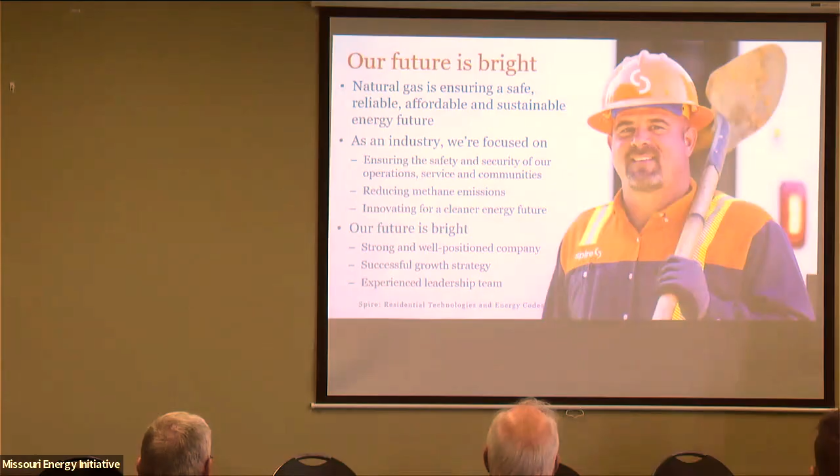I think we heard throughout this conference, and just in general, that natural gas is going to play a part in the energy needs of this country, the Midwest, and Missouri for quite a while. So we do think the future is bright for our industry. Now the question is how do we play into that world? What do we do? What can we do to help out? I'm going to talk a little bit about that as we go on.

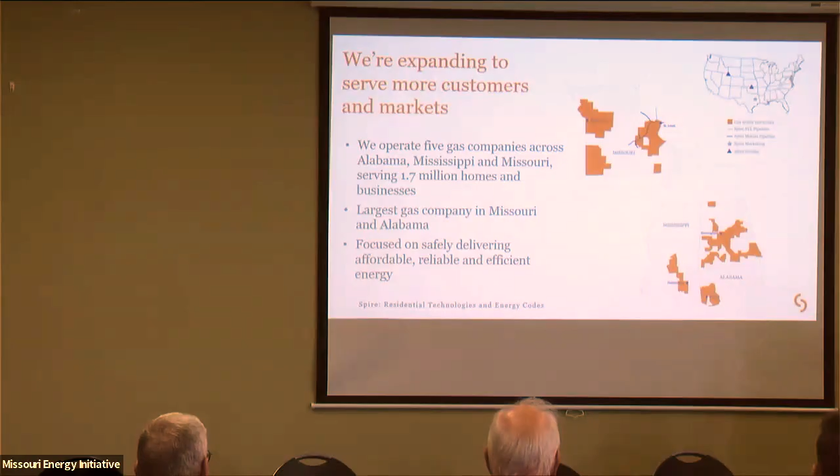Just as a footprint of where we're at, we're the biggest gas utility in Missouri and in Alabama. We serve about 1.7 million residential and commercial customers throughout those areas, and got a little bit in Mississippi as well. On the unregulated side, we have a marketing group out of Texas who handles procurement for some of the larger customers in this area and around the country. And in recent years, we've gotten a gas storage in Wyoming that we basically started the last couple of years. So that's kind of who Spire is and where we're at.

Just a little bit of natural gas at a glance. We've heard these words throughout the conference so far, but to put some numbers to it, we focus on some of the benefits we feel we bring to the table. I'm not going to go through all of these, I know it's a bit of an eye chart, but reliability—because of some of the technologies over the last decade, it's created a lot of supply. We have 100 plus years of supply, and the great part is it's domestic. There's very seldom outages, so that's a component we use, and some things coming up will show why people use us in that fashion to make sure we're there.

Affordability—we've heard that several times too. We pride ourselves on being an energy that's affordable to homes and businesses compared to other energies, and it's brought savings to those. We want to continue that, and we feel that's going to be out there for a long time—long-term affordability, especially with the supply and reliability we have.

And efficient. There's not many fuel sources where it's at the home at 92% efficiency. So there's not a lot of losses along the way. We don't have to generate it to get there. So at your home or business, you're at 92% efficiency for that energy—there's not much loss.

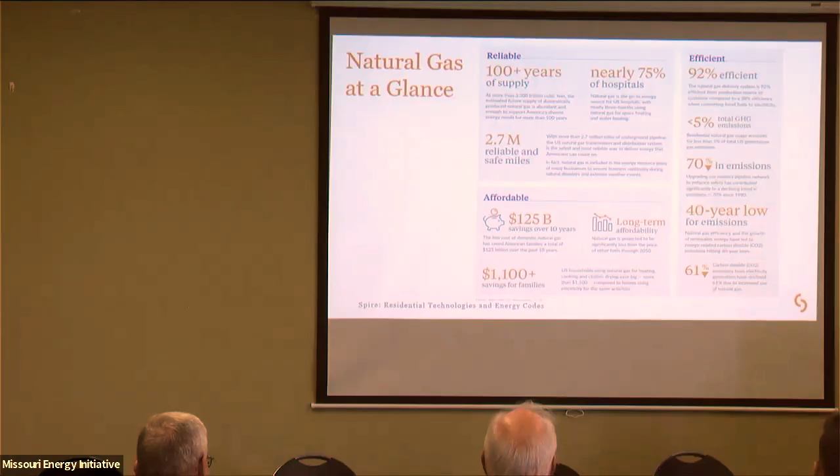And then emissions. A lot of this has to do with energy efficiency and the way homes and businesses are built now, which has reduced emissions. But most of this comes from electric generation switching over from coal to natural gas—a big reduction in emissions over the last several years because of natural gas.

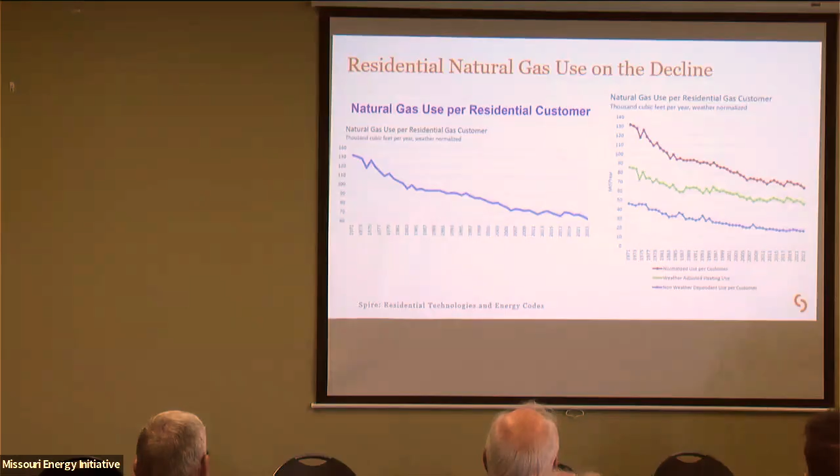I probably should have had this in a different part of the slide deck, because I'm going to refer to it again. This is kind of a good sign for what we're trying to do and what our customer needs are. Natural gas use on the residential side has gone down considerably on a per-home basis over the last several years. This chart goes from the 70s all the way up to 2023, and you can see the reduction in the amount of energy a home uses over the years. The one thing to notice, though, is it's kind of flattening out. So what do we do next? How do we work towards that next incremental bump?

The second part of it is broken down not just overall, but into heating and non-heating use. The red line is the overall. The green line shows the heating use over the years, weather normalized, of course. And the blue line shows the non-heating components and how that use has declined over the years.

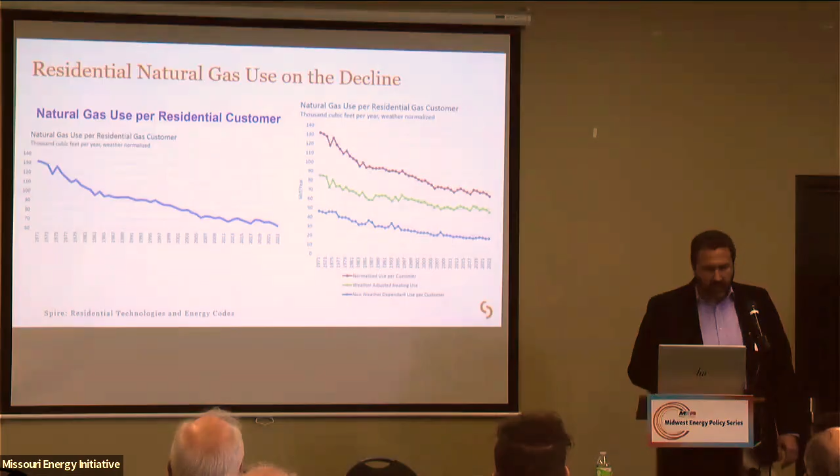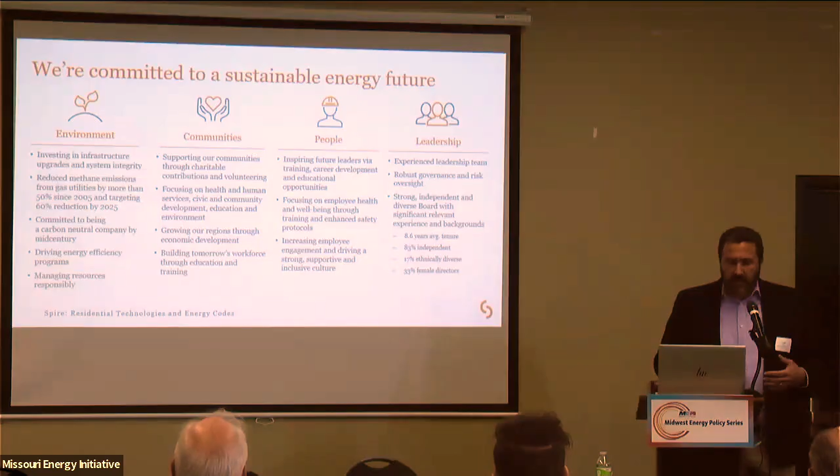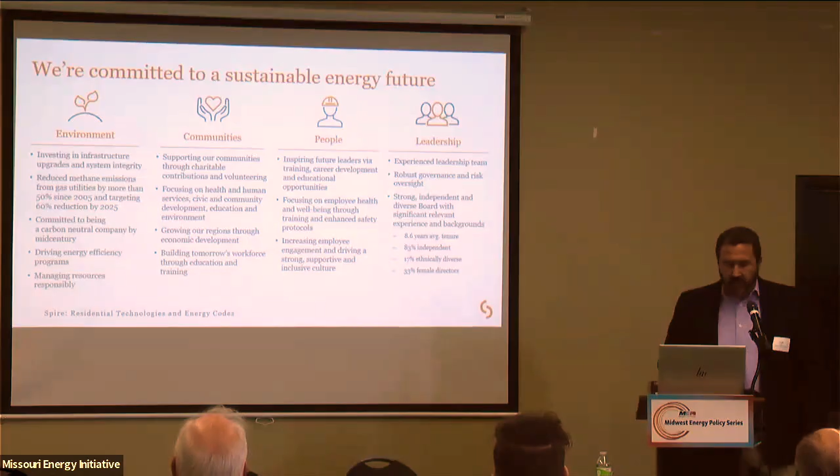I'll talk a little bit about next slide, but one thing we're starting to do more is creating a sustainability plan and report, and you can go to our website and get more details. I think the 2023 one is there, and the 2024 is about ready to come out. But what are some of our commitments and what are some of the things we're doing, not only environmental, but community, people, and leadership, to create a better sustainable future for ourselves and for our energy. Just a couple details of it, kind of things that may be more relevant.

Some of the things here lately that we're starting to do that will play a big part, and this will come out in the 2024 sustainability report, is advanced leak detection. It's something we've piloted and now we're starting to implement. We always do some version of leak detection, but this is a more sophisticated way where we're contracting people out to survey over the next couple of years, 3,000 miles, to try to find out where more of those leaks are at. Kind of map those out a little better, and what that can lead to is more places to fix those leaks, reduce emissions, reduce methane leaks, and create a safety aspect to it as well.

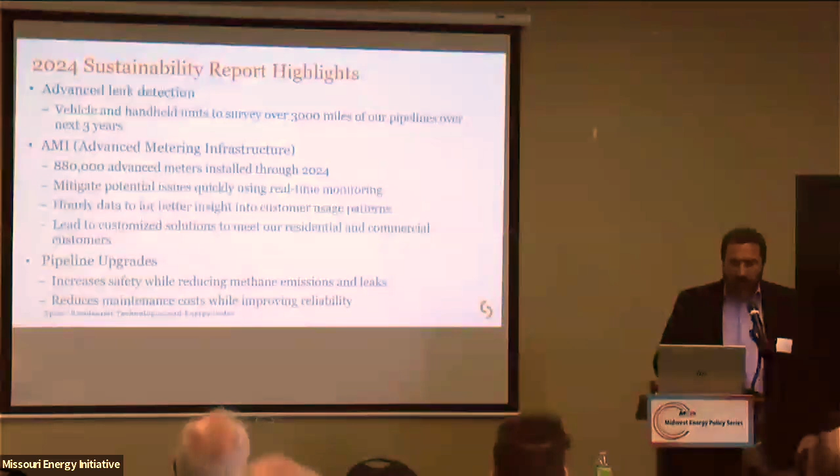A big thing we've been working on over the last couple of years, and we continue to work on, and this is something we're probably leading most gas companies across the country on, is we've replaced about 880,000 meters through 2024 for new smart advanced meter systems. So we're putting in, starting with the smaller meters, residential, small commercial, ultrasonic meters.

I heard a lot the other day and yesterday and throughout this about demand response and behaviors and how we change things. What this is going to help us do is two things. One is a safety aspect, right? With this technology, we're able to either automatically shut off the meter in a safety situation, or we can do it remote. So there's a safety aspect that'll help us out.

But the part that's really going to help us is as far as knowing what our customers are doing. We're going into houses less and less. Over the years we do a lot of soft turn on and turn off, so we don't necessarily go out, we just take a read. So we don't go into homes as much as what we used to, and we have less information about what's in that home. What are people putting in? What does their energy use look like? The advanced metering system is going to help us get a better understanding of what our customers are doing. We're not only going to get daily reads, but hourly, and maybe even further down into that, and use that for a couple things. One is to help us better understand what our customers' energy use is, how they're using it, but also provide that to them so that business or that home can start to make better energy decisions.

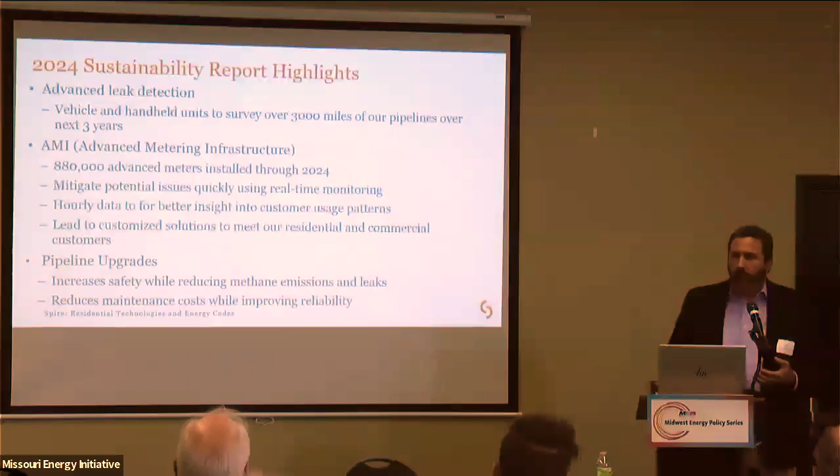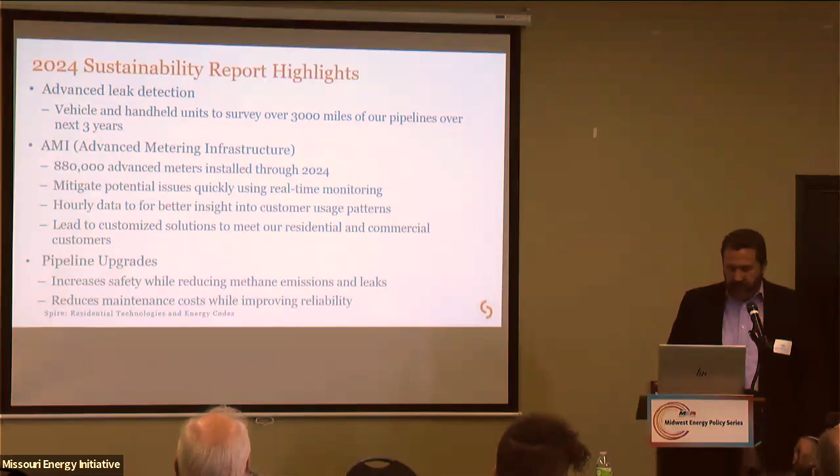And pipeline upgrade. So we're continuing to upgrade older sections of our pipe that typically are more prone to more work, more leaks and things like that, and we continue to do that. That's a safety aspect, but also reducing methane emissions, leaks, and lowering O&M. So those are just some of the highlights from our sustainability report.

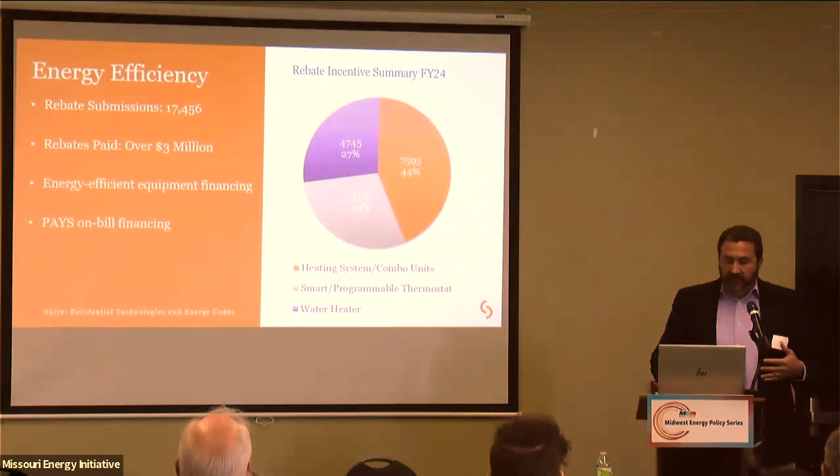So energy efficiency, this is just kind of a summary over the last year, the metrics we have for residential energy efficiency. About 17,000 rebate submissions across Missouri, about 3 million dollars in rebates paid over that time period. On top of it, I don't have the numbers, but we also have energy efficiency equipment financing, and also a PAYS on-bill financing program. How those break down, most of it's the heating, so roughly 45% is on the heating side of things, and the other portion is split between water heating and thermostats. But that's kind of a look into our programs that we have here in Missouri.

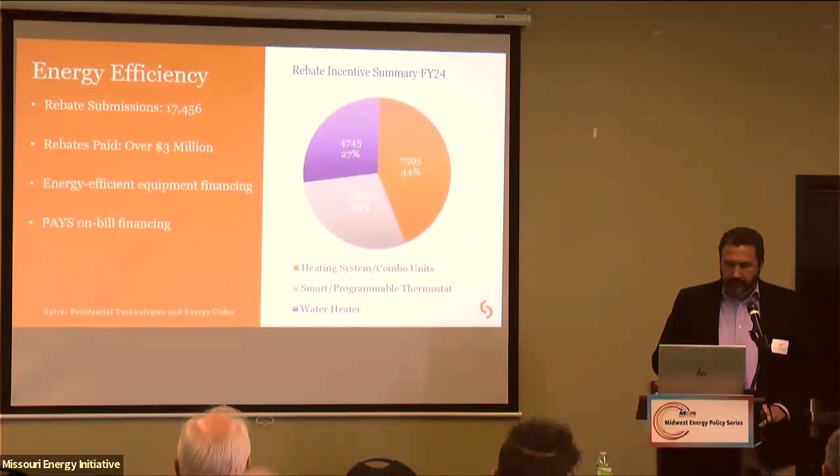From the residential side of things, what are we seeing over the last several years? Just to give a state of the union on what we're experiencing from the residential gas side of things. The pandemic changed a lot of things. I'm still working from home 2 or 3 days a week; I never used to do that, and a lot of people are. What we've been experiencing really since then is that most of these homes, both new and existing, we've seen an uptick in gas appliances overall.

The person's home became something different than what it was before. People are there now. They're cooking there more, entertaining there, working there. And that kind of changed the dynamics. I'll talk a bit about some of the individual appliances we're seeing more market share of.

We are seeing a considerable amount of homes, especially new homes, putting in condensing and high efficiency furnaces, taking advantage of those rebates. High efficiency furnaces are definitely the majority versus non-condensing furnaces. So that's a positive aspect.

But some appliances we're definitely seeing an uptick in, especially in new and existing homes, is gas cooking. Apparently a lot of people are watching the Food Channel and want to be a chef, and everybody's looking at a gas cooktop. So we've definitely seen an uptick in that.

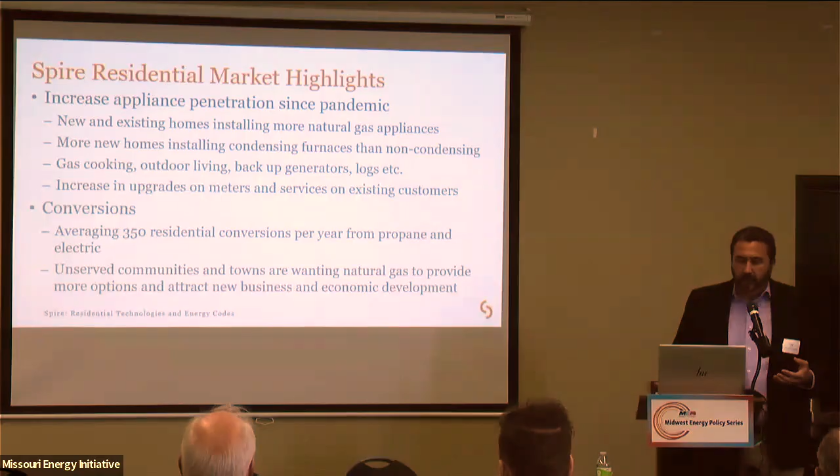We also have - I just had an email yesterday - a lot of unserved communities and towns across the state near our infrastructure wanting natural gas to have more options for their business and better economic development. A pretty sizable town just yesterday contacted us to see what it would take to get gas to their market. So those are some of the highlights of what we're experiencing.

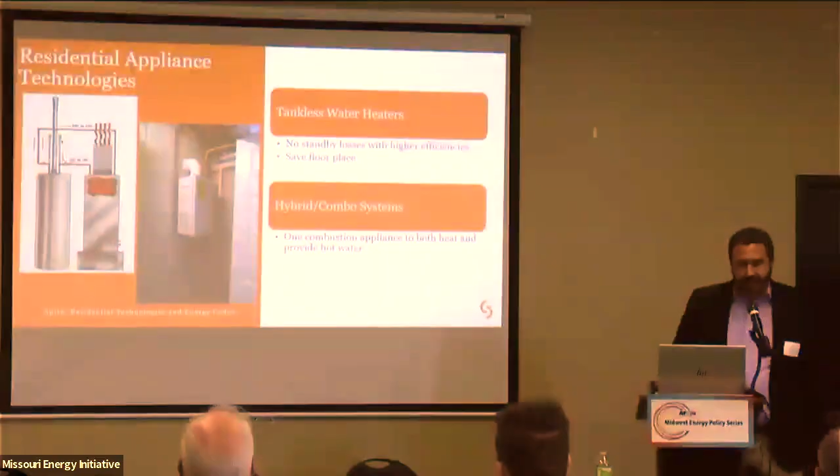A little bit about technology now. I'm going to focus on the technologies that are less prevalent in our area currently, but which I think could have more potential going forward.

Most of these are going to be more energy efficient and can help save on some residential usage. Tankless water heaters have been out there forever. The Midwest and Missouri doesn't see a lot of these. Our counterpart down in Alabama, it's probably a majority of their homes that put in tankless water heaters.

Really, I think what it comes down to is space. Down in Alabama, and actually parts of our territories in the Southwest, Joplin and Springfield, a lot of those areas don't put basements in. So they have space constraints, and those dollars matter. It's the same way down in Alabama. A lot of their HVAC and water heaters are either in closets in the garage, closets in the house, or in some cases attics, and even they're putting tankless water heaters on the outside in warmer climates. But when you do that, they have those space constraints.

Those dollars of spending a little bit more on a tankless water heater is beneficial to them. Whereas most of our areas in St. Louis and Kansas City have basements, so they don't really have a space problem. So we're not really seeing it as much, but I can definitely see something that will increase over time. And they are definitely higher efficiency just because they don't have the standby losses.

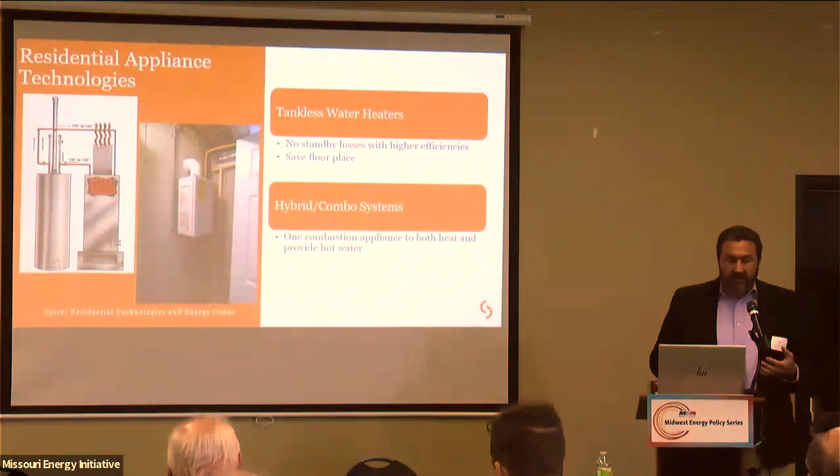It definitely is good heat, and the reason why some go to it, especially in multifamily, is you got one vent, right? One vented appliance, one combustion appliance, and it serves for both heating and water heating. And you can do that with a tank or a tankless. It's prevalent a lot in other parts of the country and in Canada, but we don't see it a lot here in the Midwest. But it definitely has its place.

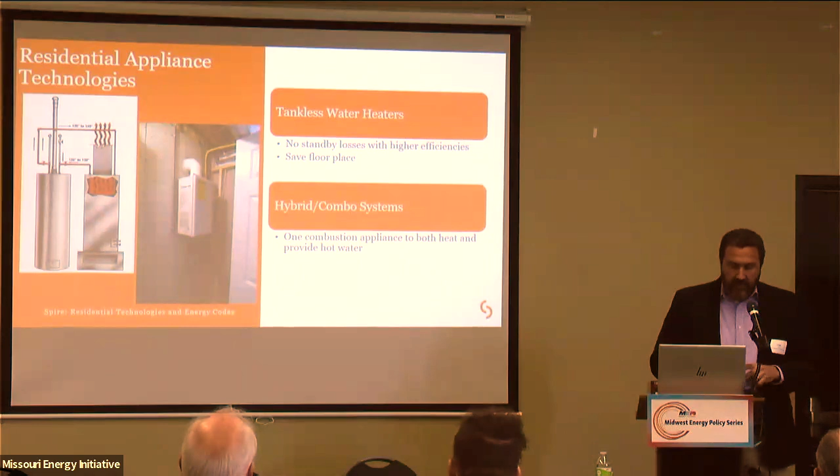This is one that has been trying to take hold for some time, but it just hasn't been commercially marketed enough or made to where the cost is more reasonable. Natural gas heat pumps play a part mostly in the commercial world, mostly where electric prices are higher. But it does have some significant benefits - it uses about half the energy when you compare it to a natural gas furnace and water heater.

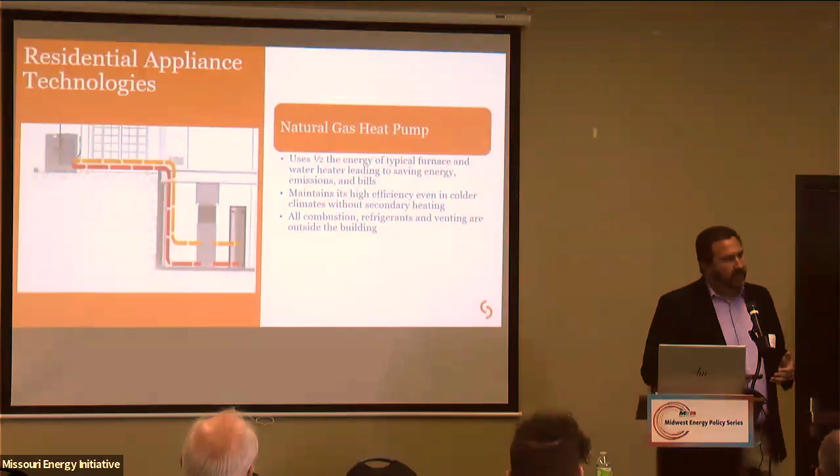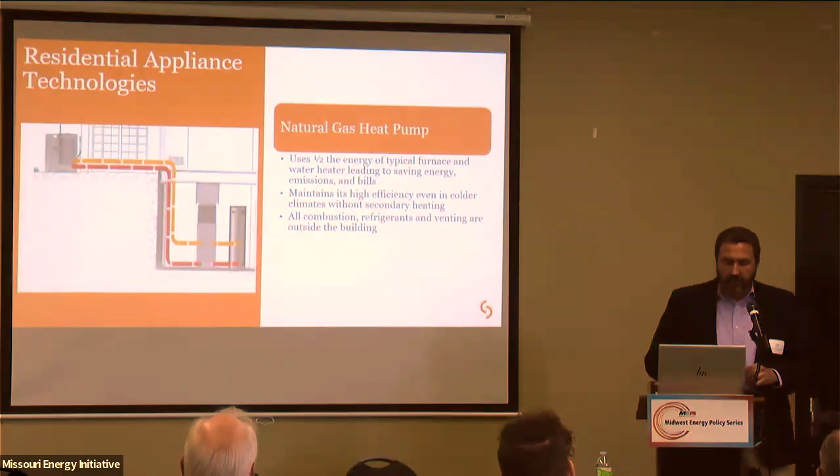It also maintains high efficiencies even in colder climate zones. But once again, we don't see this a lot here in the Midwest. Most of it has to do with energy and electric prices. But it's definitely something that's out there. It's been out there for a little while, and it plays a bit more in the commercial and multifamily world than it does in residential. But it's something we could potentially be seeing a little bit more of over time.

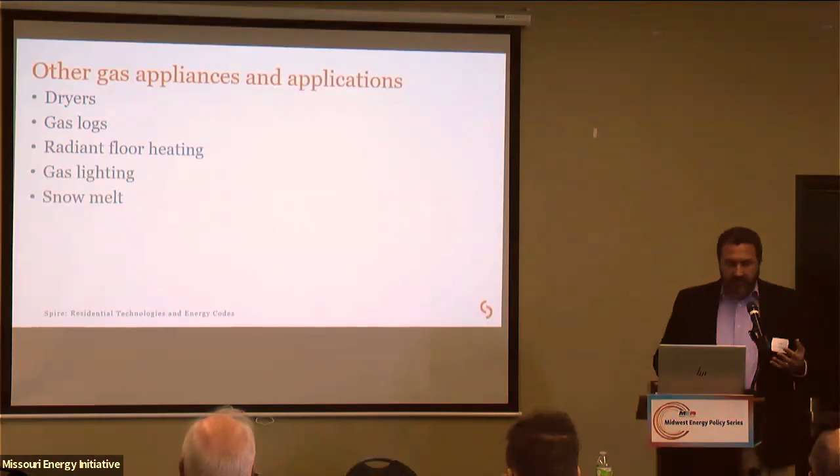Just some other gas applications. Once again, not as many changes in the residential world as in the commercial industrial world, but other applications obviously from a residential standpoint - dryers, logs. One thing that kind of stood out to me, I thought we would see more of over the years, is radiant floor heating - definitely an interesting topic. If you've ever been in a home with radiant floor heating, it's probably the most comfortable heating you could possibly have.

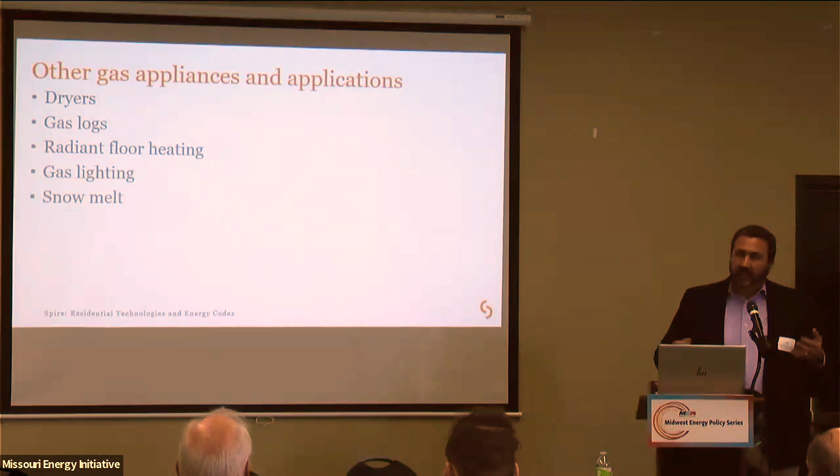The problem is, if you think about it, when you have heat coming from the floor up, you're heating where you're actually at instead of heating the ceiling. So the difference here is when you've got forced air, your ceiling is going to be tremendously warmer than down by your feet. This reverses that, and it's definitely an energy saver because you're not heating all your space, you're heating where you're at - it's one of the more comfortable ones.

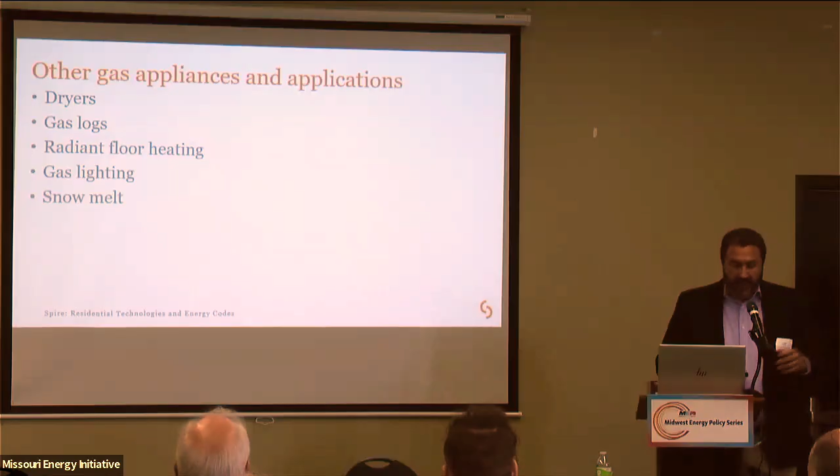The downside is, because of the climate we're in, you still have to have your central air and ductwork and everything, because you've got to have the AC. So it's kind of like double - you're basically doing it for double. But it is something I thought we might see more over time. We see it every once in a while, mostly in custom homes, and in gas lighting and some snow melt we see in the residential world.

This is from the EIA, showing overall, on an average across the country, where our dollars go in an average home. Two of the biggest components are heating and water heating. This will look a little different if you're in the north versus the south, but this is kind of an average, just showing the importance of heating and water heating usage and how it relates to the home and where our dollars go.

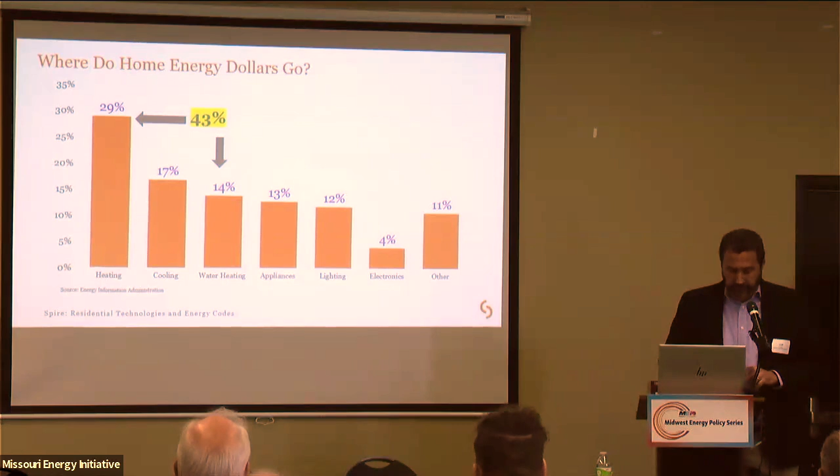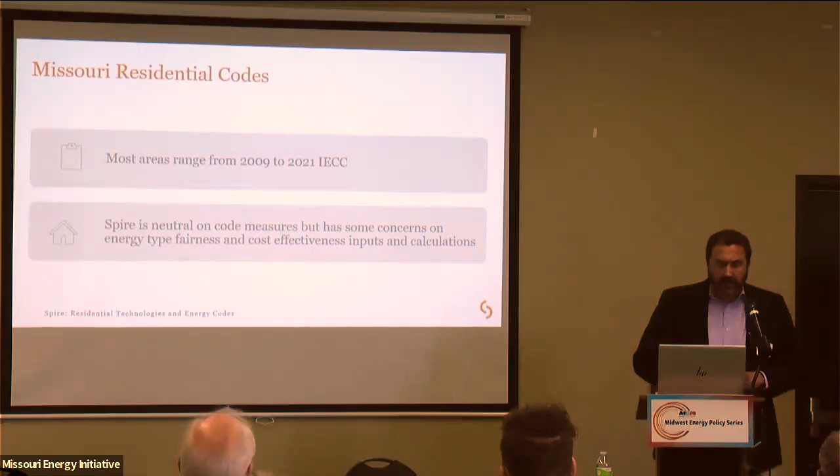So digging into the codes a little bit. I used to deal a lot with codes, and a lot of the municipalities around St. Louis had different versions of it. For the most part, our energy codes range from about 2009 to 2021 in most of our areas. The only one that has so far put in the 2021 IECC unamended is Kansas City, and they did that last year. But those are kind of the ranges.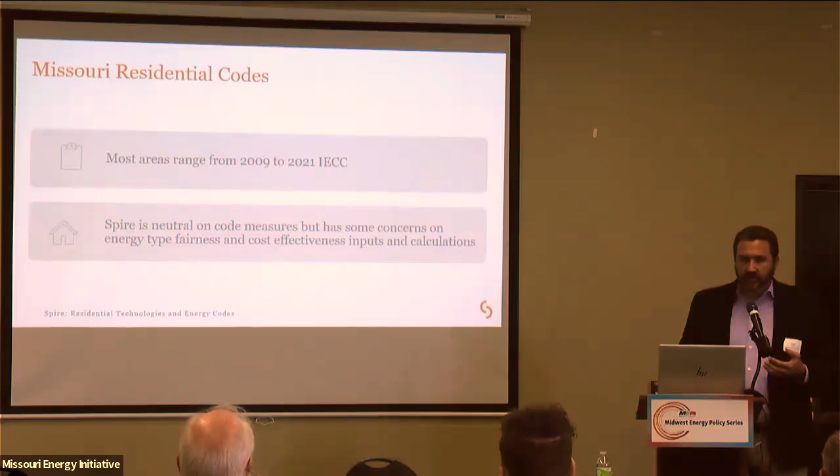For the most part, Spire in general is mostly neutral when it comes to code measures. We do have people with Spire who have been on some of the code committees and part of the code process. What we do have some concerns about, and I'll show some data to support it, is energy type fairness, and some of the data and inputs in the calculation used for cost effectiveness. We have questioned some of those things over time, and I'll explain a little bit about that.

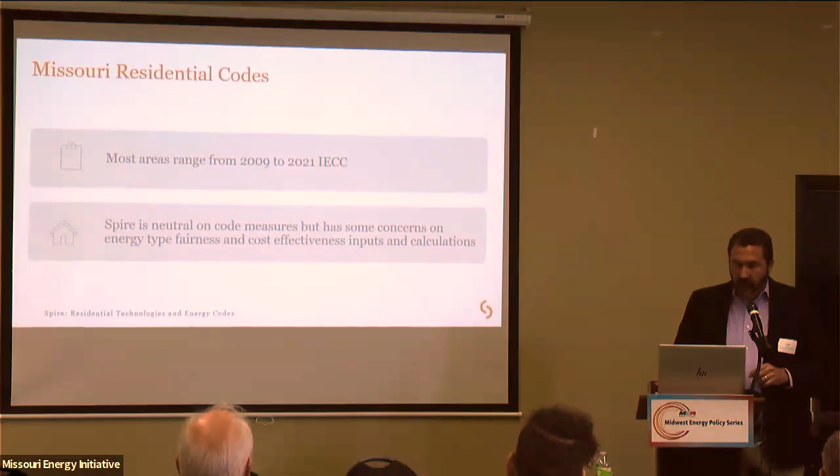But for the most part, Spire tries to stay neutral on code measures, but we would like to have some input when it comes to the cost effectiveness and some of the calculations, and I'll explain a little bit of that.

So I did an exercise to go through an example of maybe where utilities can help with data and help support or show what our customers are doing. I've updated some things I've done before. I looked across Missouri at homes built from 2020 to 2023, and looked at their energy use over that time period, from those years all the way through last year. That created about 22,000 points of data for all the homes during that time period.

I only looked at customers billed for 12 months so I could find out a full year's worth. If they came online in June, I'd disregard that and take the next full year's worth. So this information is for 12 months of billed usage for customers, and we only looked at homes where natural gas was the primary heating source. I didn't break it down further, though this can be done - I can bring more data in and look at things on a square footage basis or more regionally. But this is just overall.

I think the average square footage in most of our areas, if I remember right, is just a little over 2,000 square feet on average. I also left out multifamily, multi-tenant units - this is just single family homes or attached units. So we looked to find out what they're using, and we weather normalized the data to find out, on an average year, what these customers are using.

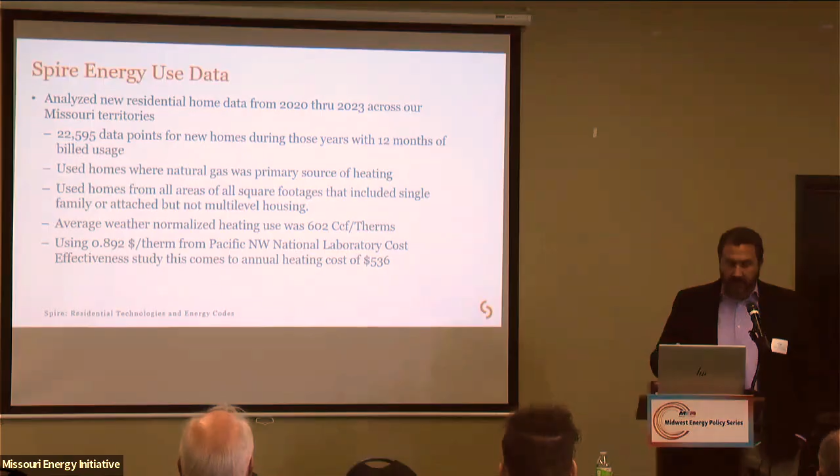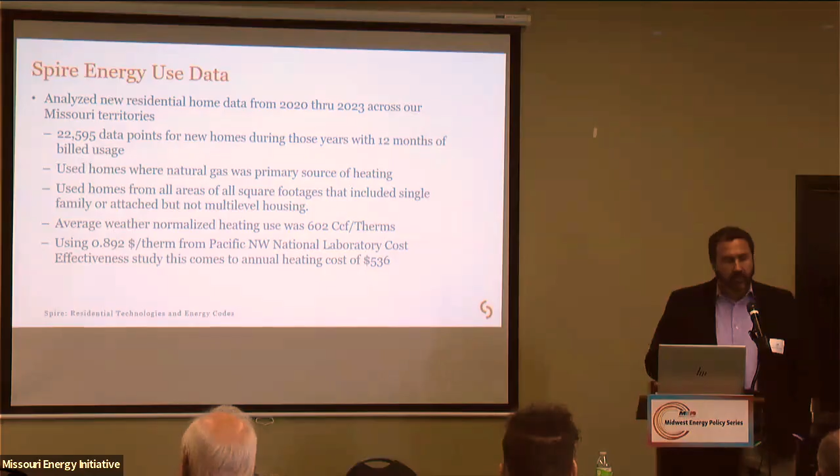It's actually a little bit below that for the years that I looked at. But with that said, I took those costs from that document, and that results in about a $536 a year spend on average, normalized for a home, for those 2020 to 2023 homes that were built during that time frame. So how does that relate?

So that's a great sign for what we're doing, meaning the way homes are built, the efficiency of the appliances being put in, the equipment, the measures that have been put in place in a new home have got us close to where the 2021 IECC is at. So that's a good component of that.

I was trying to think of where this leads to, what takeaways we do, and what are the next steps based on this. I think from my recommendation, from a utility standpoint, what can we do to help provide the data that's necessary?

I was laughing last night while I was talking. I kind of attribute it to my golf game, which is not very good right now. I don't know if any of you play golf. It's a very frustrating sport. But when I first started playing, those first years, I'm like, well, I'm getting better, right? This isn't too bad. I was lowering my score, and I was even using a cheap set of clubs.

But at some point in time, things get tougher, right? So what did I do? I played more. Maybe I took a lesson, and maybe I'd get an extra stroke out of it or two. And then maybe I bought a nice new set of clubs, because it's not the player's problem, it's the dang club's problem that's causing it, right? My point of all that is it took a lot more effort, a lot more cost to get to that next level. How did I reduce that stroke?

I think to some extent it relates to where we're at in some of our efficiencies in our homes, in our businesses. What do we need to do? How do we take that next step?

I personally think a lot of it has to do with education, behaviors, using what we've already done, what's in place, and using the data we can support to find out what can we do, when can you use that energy, how can you use that energy, what can we do to help you as a homeowner or business make better energy decisions.

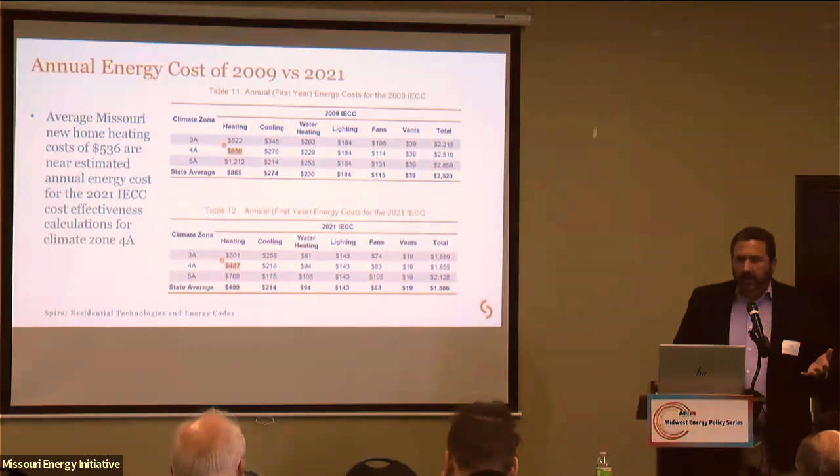And so I think that's a part of it. The second part is I think it's back to kind of relationships - what can the utilities do? We have ties to a lot of folks with you all. I'm tight with a lot of the home builders, the HBAs. We heard a little bit yesterday about what the HBA is proposing and the dollars they threw out there, and then what the counter to that was.

Well, the answer is probably somewhere neither one of those. But what is the right answer? How can the utilities create those gaps or bridge those gaps? How can we get the stakeholders together? Because unless you get the stakeholders together and actually work on a solution that works for all of them, I'm not sure we're going to come up with a solution that's implementable or one that's going to benefit the homeowners effectively - because we're always going to get this $30,000 end and this $7,000 end.

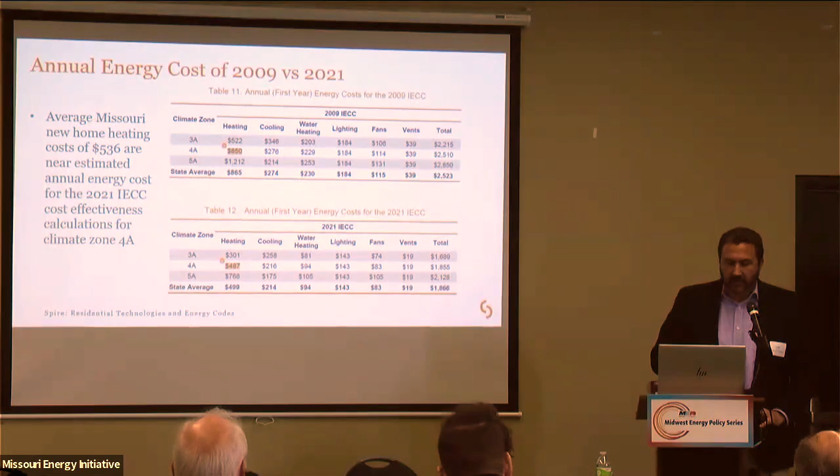Well, where can we go to where we can work together, and how can the utilities help with that? I think one thing we can do is be better at being more open about our data, what we have, and how we supply it. We've been pretty reluctant over the years to supply that, but I think it's something we need to do a better job of, just as an industry - giving you all the tools and data you need, and everybody needs, in order to make those decisions.

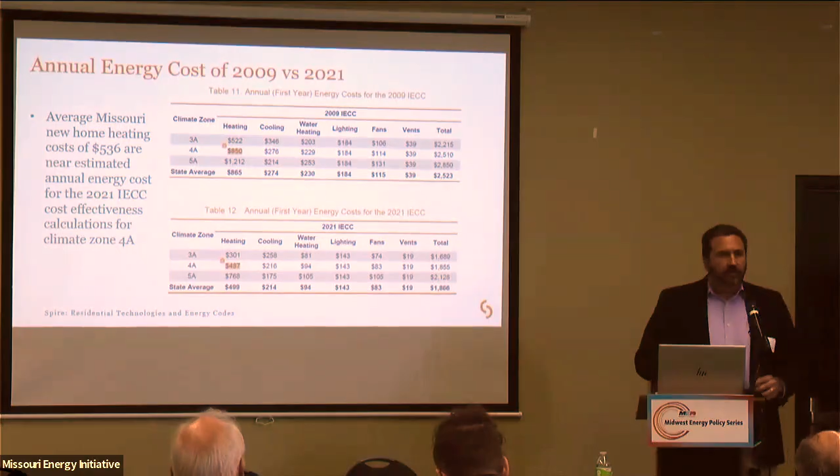And so those are kind of, when it's all said and done, trying to play the middle ground - my recommendations. But I will leave it at that.